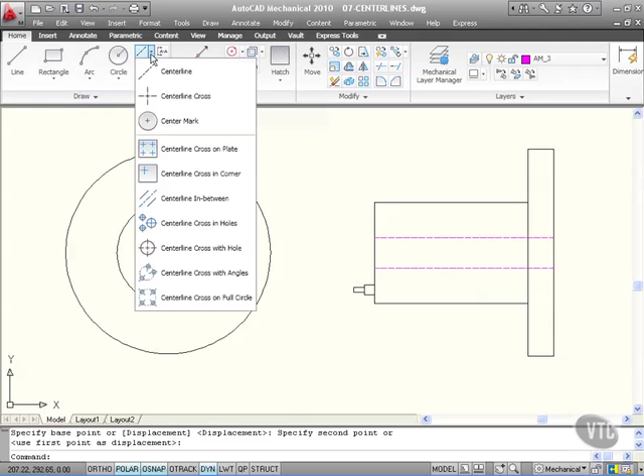So if I go to my draw panel here, there's my centerlines. I click on the down arrow and I want a centerline cross, like so. I come into the drawing area and it says specify center point. Well, that's easy, there's the center snap, left click. Specify diameter, I come out to the far quadrant and click.

Notice there is a very slight overshoot. It's not really big enough to be distinguished. What I need to do there is go to the standard that I'm drawing with, so I'll just zoom back in again, like so. I need to make that overshoot bigger.

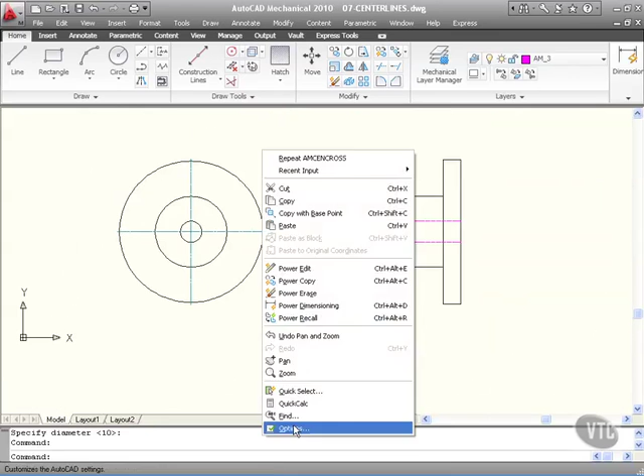So it's right click and options, and then I want my AM standards here. I'm using an ISO standard and it's metric. There's the centerline option, double click it, fixed size, and so on. So I need a fixed size overshoot of 3. No, I want a fixed size overshoot of 10 in there. And I'll OK that, I'll apply it.

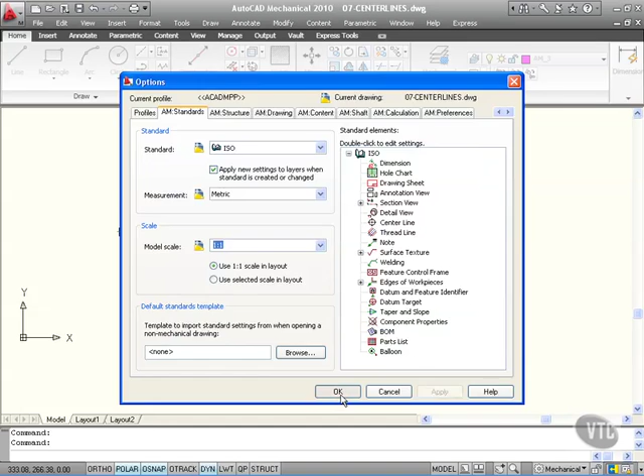And I'll OK it, and I need to draw that again now. So what I'll do is delete these lines, like so, and let's see what changes that makes. I go to the centerlines here again. Centerline cross, center snap, quadrant snap. Notice the overshoot is bigger because I've changed it in the ISO standard.

Now a standard centerline, well that's easy. I select centerline and it's just object snap, so I go midpoint to midpoint, like so, and there's my center along the side view there rather than the front view. Now that's great, nice and quick and easy centerlines.

Wouldn't it be nice though if they drew centerlines with the holes attached? Let's switch on our construction lines layer. It's actually frozen off at the moment, so I go to the layer pull down, click on the snowflake, turn it into a sun symbol, click in the drawing area, and there's my construction line.

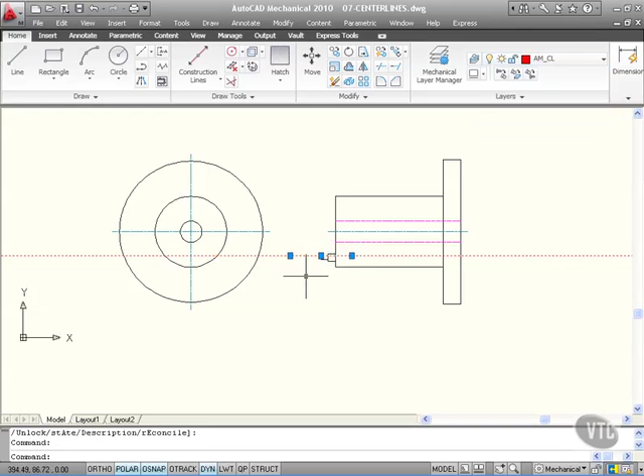Now the first thing we notice there, look, our construction line is actually out of whack there. It needs moving, can you see that? It doesn't actually tally up with the spigot. Now that's been done deliberately, so we click there, click on the grip, and just move that down to a midpoint. So shift, right click, midpoint snap, and I want it to go through that midpoint there. Check that your construction lines are correct, otherwise this isn't going to work, is it?

Hit escape to deselect. Now what I've got is I've got an intersection over here to show my spigot over here. So let's have a look at my centerlines here.

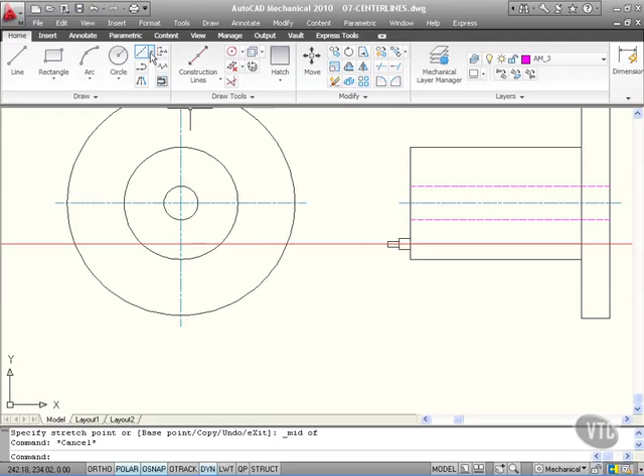If I click there, I want a centerline cross with a hole. Places a hole at a specified point. So if I click there, specify center point, there, like so. Then it says specify diameter of hole. So if I go over here, like so, specify diameter of hole - well how big is it?

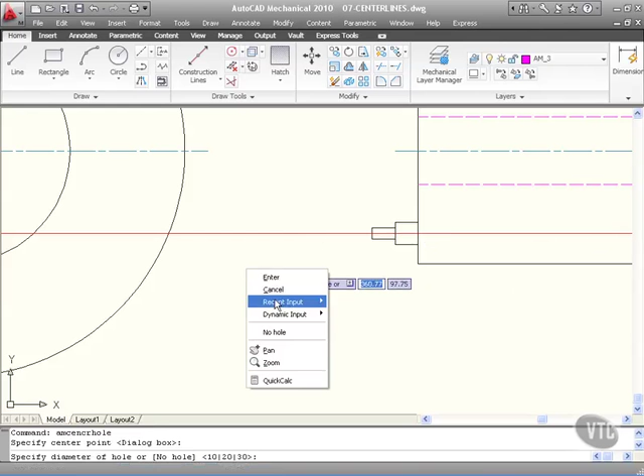I don't actually know how big that is. How big is it from there to there? If I right click and say no hole, like so, it'll just place a centerline cross diameter of 10. So if I just press enter there to accept that, can you see the cross has gone in there? It's in there like that.

Now, I've put there no hole. If I press enter, it'll take me to the dialog, and I can actually select which method to create a centerline like that if I want to. Don't want to do that in this case, I'm going to cancel that.

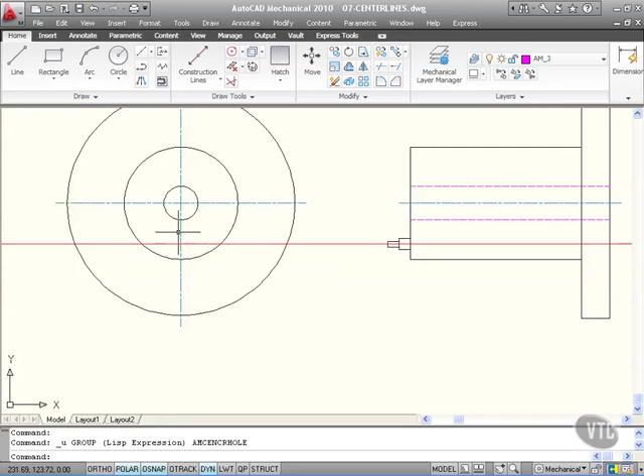So let's undo that 1 second. So you see the centerline has gone from there. Let's zoom in on here. That hole has to go from there to there, so it's easy - use the distance command. Measure the hole first, and we go 1, 2. It's 10 in diameter, OK. Now let's do that again.

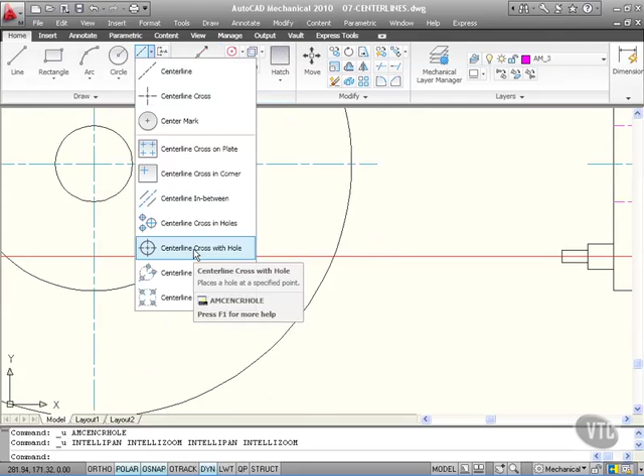OK, so I'm going to pan slightly now and I'm going to place this hole differently. So I go up to my centerline with hole again here. Centerline cross with hole, the center point is going to be right here, like so. Then it says specify diameter of hole.

So if I go from there to there, I need endpoint to endpoint. So shift right click, endpoint, I want there, shift right click again, endpoint to there. It puts the hole on the current layer. Can you see that? It's on the hidden layer right now. So what I'll do, I'll press enter to finish, or is it enter?

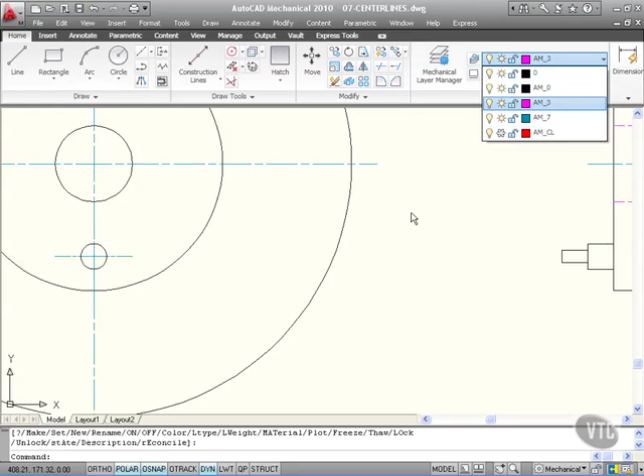Enter will bring up the dialog box, hit escape. And I just click there on my hole, change it to my appropriate contour layer, hit escape, and what I'll do, I'll actually freeze the construction line to make it a bit clearer. So there you go, just frozen there. And as you can see now, there's my hole with my centerline.

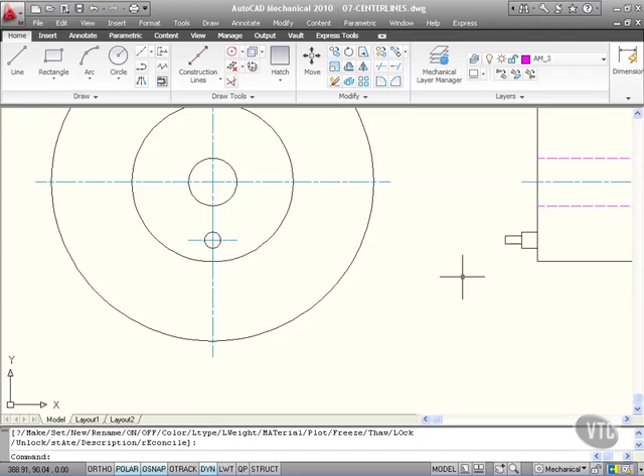Easy. Now there's loads of different types of centerlines, holes and configurations. I could bore you absolutely stupid with those for days on end, there are loads of them. I've shown you some of the basics there. They are tools that basically make you more productive, quicker, more profitable, and again, impress your boss. Things like that are so much easier when you know that you've got to draw a hole with a center, rather than have to draw loads of construction lines horizontally and then trimming and tidying up. So utilize your centerlines to your advantage when you're using AutoCAD Mechanical 2010.